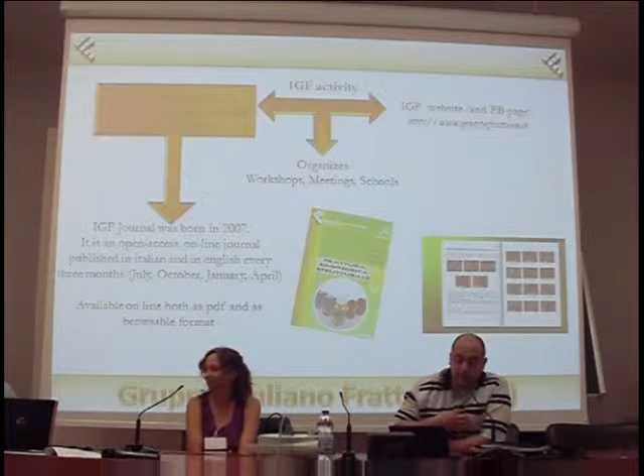I think the journal is quite interesting because the referee process is completed in less than 3 months, so if you want to publish something quickly, we are able to proceed with the review in less than 3 months. It is available both as a PDF format and as browsable online. You can browse it online, it's quite interesting, also funny.

Also, in the last year, we organized an interesting website, you find the address here. In this website you can find up to now more than 2,500 papers, completely available online.

These are not only IGF papers, because in the last months we also published the proceedings of some international conferences. I mean the Crack Paths conference, the Fatigue Crack Paths conference organized in 2003, 2006, 2009 in Parma and in Vicenza by Andrea Carpinteri. We also put inside all the proceedings of ICF 11 in Turin.

Now we also publish online the last 10 years of La Metallurgia Italiana, and all 30 years, just finished now, of Metallurgical Science and Technology. So we are trying to build up an archive where we can find as much as possible inside.

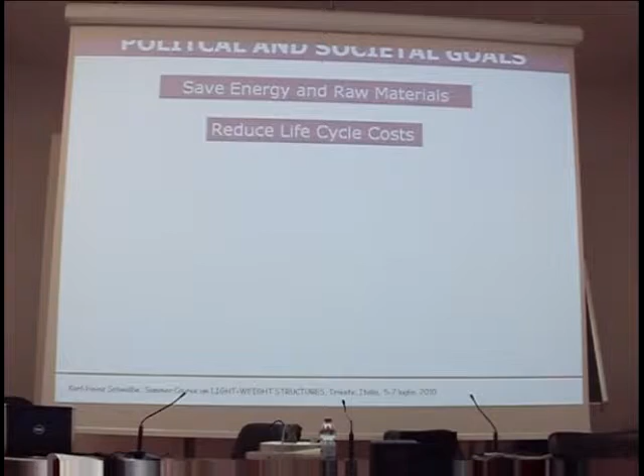One of these goals is to save energy and raw materials. One of the measures for saving energy and raw materials is making our structures lighter, because in that case you need less raw materials, you need less energy to move, for example, a piston in a combustion engine, or to move your automobile or your aeroplane, and so on and so forth.

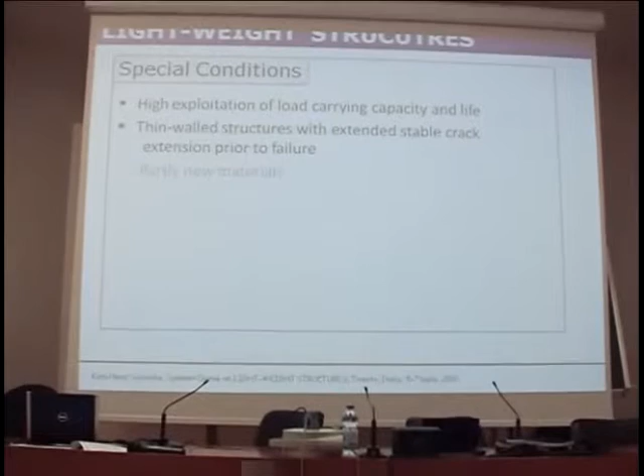And so this is the topic we are now going to talk about. When you talk about lightweight structures, we have conditions that are different from what we have been used to when we build a stationary plant, such as pressure vessels and steel mills and whatever.

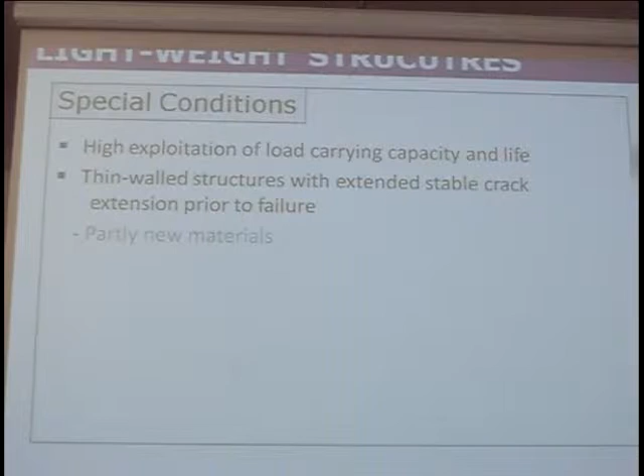And so this ends up with thin wall structures, and in the case of failure, which we of course want to avoid, we sometimes have extended or large amounts of crack extension prior to failure.

We have partly new materials. This is the subject of Professor Iacoviello's presentation.

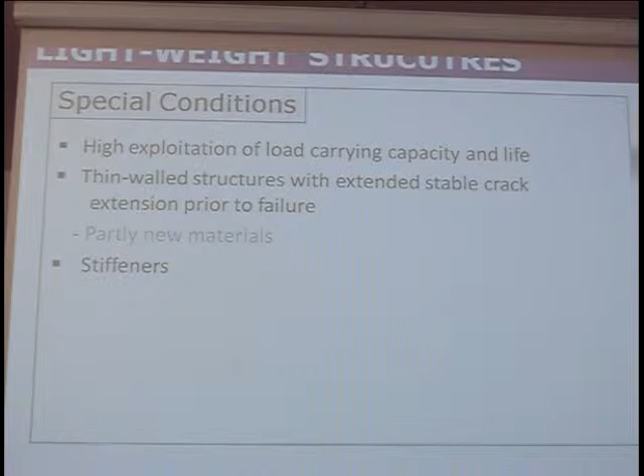And when we go to thin wall structures, which means we have very thin, relatively thin sections - to give you an example, when you enter an Airbus or a Boeing plane, the outer skin is just 1.6 millimeters thick. 1.6 millimeters of aluminum between you and eternity. It's sometimes a bit strange, you know.

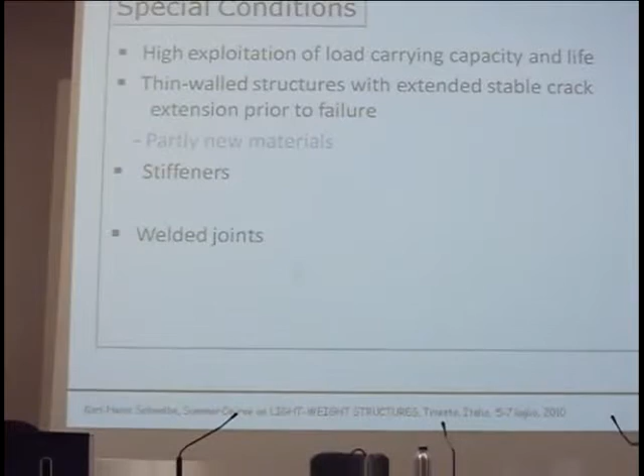And thin materials tend to buckle when you load them, and that's why we need stiffeners. As you can see here, we have to work in stereo here. And we also have welded joints, which I will briefly touch upon.

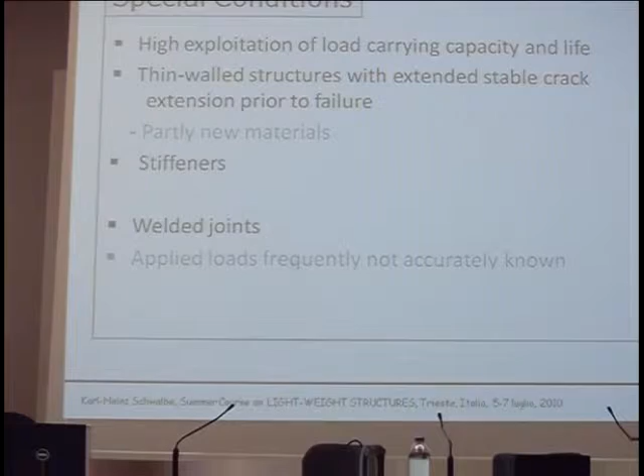And the saddest thing is that in most cases we don't know the applied loads accurately enough. You may know that frequently when it comes to critical parts in aeroplanes or automobiles, test drives are being done and people put strain gauges on the critical locations to measure what's happening during a representative - whatever that means - test drive or test flight.

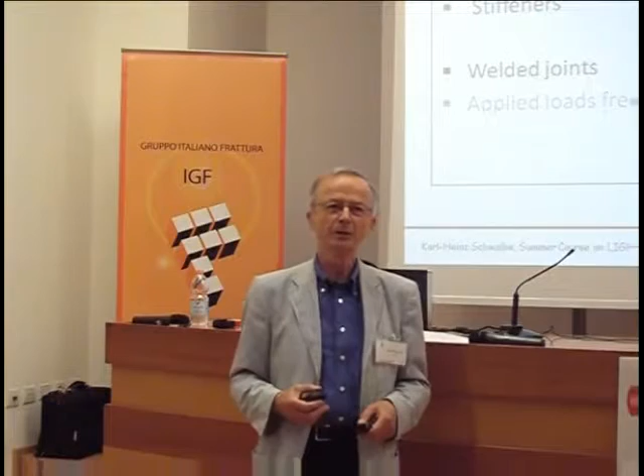But whenever you encounter a very hard, gusty flight through a thunderstorm, you are not quite sure whether the engineers have really recorded the highest load peaks.

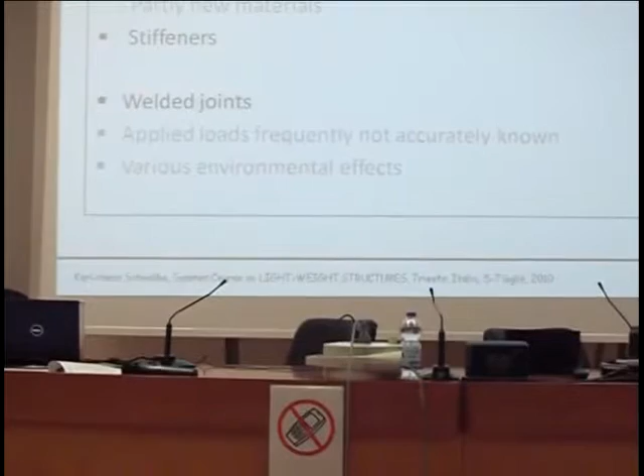Also we have environmental effects, which I'm not going to talk about. This is a separate, very wide area.

And now the question arises, how can we learn about the integrity of such a lightweight structure? A trivial thing would be to do a full-scale test.

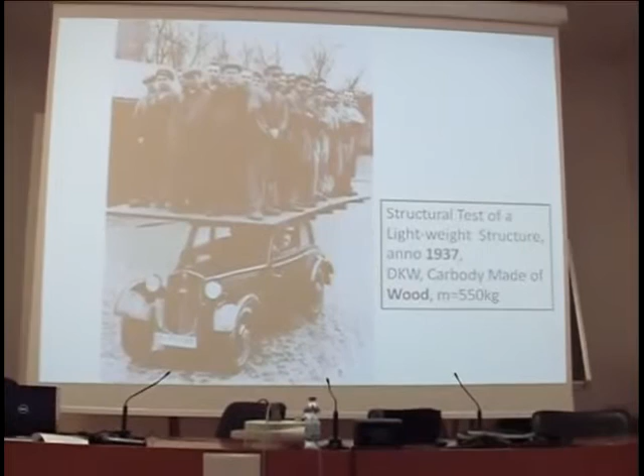Like the one you see here, this was done some 70 years ago, and I like it. I show it in almost every presentation of mine. This is what they call the DKW, which was a forerunner of Audi. You see the four rings here.

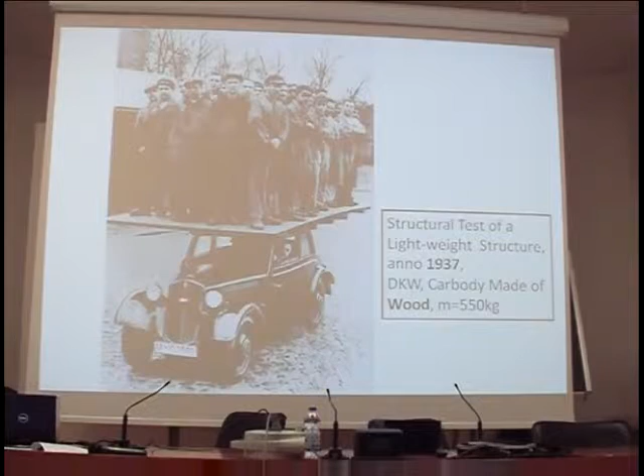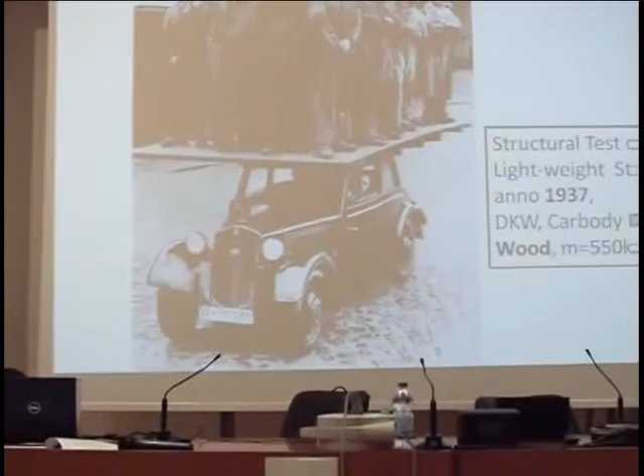So this is an old-timer Audi, and this was a test model. And the men here don't look very happy. I don't know why, but this is an example of a full-scale test, which doesn't make much sense because you would have to test every car, every kind of material you use, so it's just for fun here.

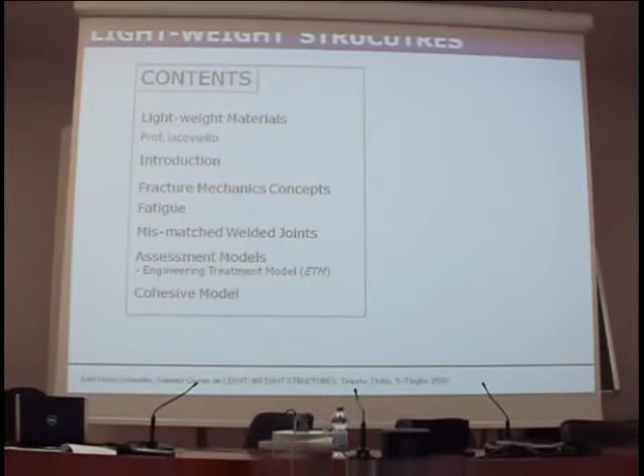Now, the content of what I'm going to tell you for the whole course is... oops, I'm sorry.

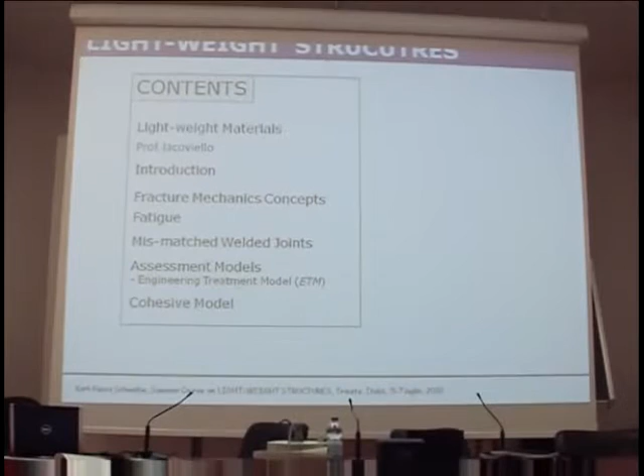After my introduction, I will talk about fracture mechanics concepts, a little bit about fatigue, mismatched weld joints - a very interesting subject by the way - and then assessment models.

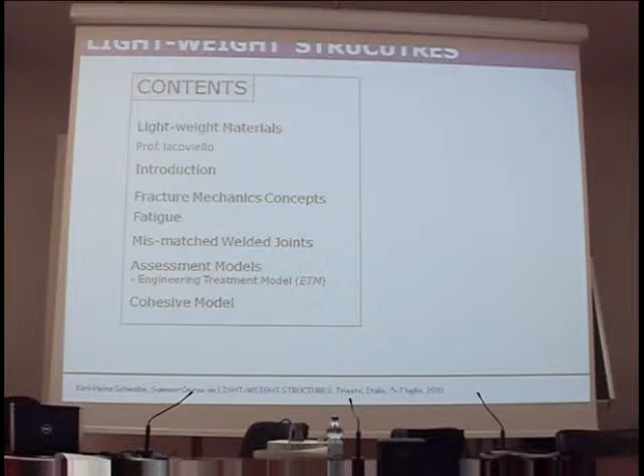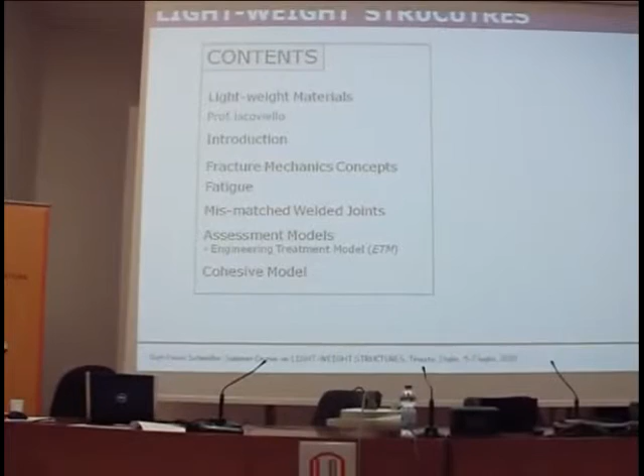And if time allows - I don't know how far we get, usually I start talking and end somewhere, and there's always a danger when somebody invites me to give a talk, I never know when I'm going to stop.

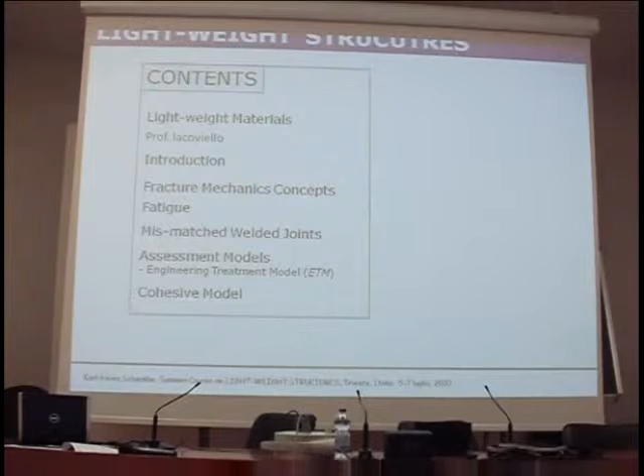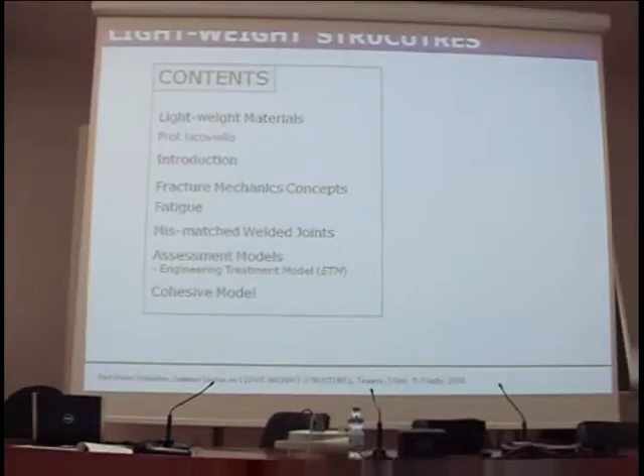And there's a very interesting numerical damage model, the cohesive model, which we use - we haven't invented it, but we have put it into kind of procedural form, so we have put it down into the form of recipes.

So this is the layout, and sorry, there's still a few more slides.

When you talk about lightweight structures, or want to meet the societal goals I was mentioning, one measure is we have to increase the efficiency of energy conversion. This is a hot topic now in automobiles, airplanes, and in the generation of electricity—turbines are becoming more and more efficient. With coal plants, if you think about it thoroughly, a big coal plant producing maybe 500 megawatts of energy has more than 50% going straight to the air, heating the atmosphere for nothing. It's totally wasted. That's when you start thinking.

Now, our goal, or our subject, is weight reduction and reliability. We could go with higher strength material, which is trivial, but there's a problem I will touch upon later. Or we go to lighter materials such as polymers, titanium aluminides, magnesium alloys, aluminum alloys.

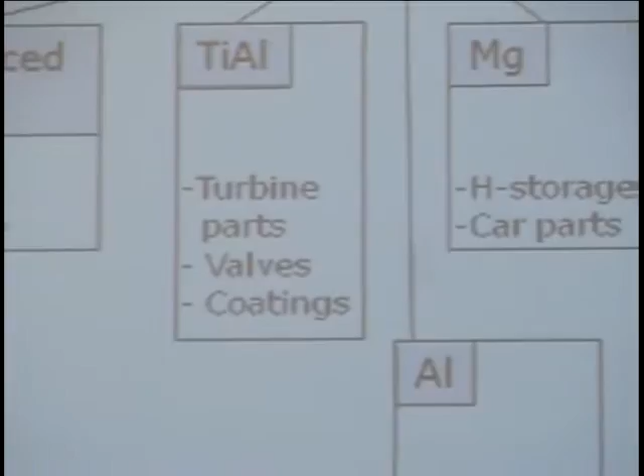By the way, this is a very interesting class of materials. I guess most of you have never had any contact with that. These are for high temperature applications up to 800 degrees Celsius, for example for turbine parts, valves in automobiles, and for coatings, but still not ready for mass production. We've been developing these materials for the last 30 years. The cycle, the time it takes from having an idea for a totally new class of materials to putting it into mass production, is sometimes disappointingly long—you can spend your whole lifetime on a new material. When you invent a new material, you know for sure you can work on it until you retire.

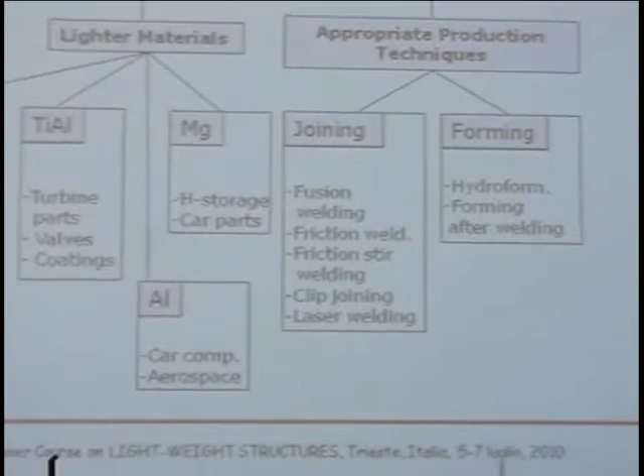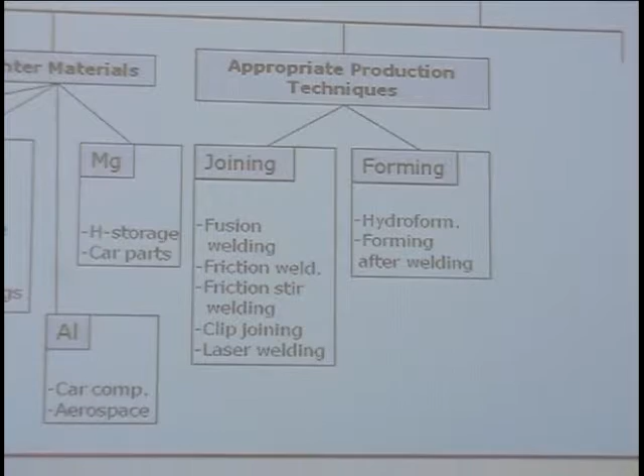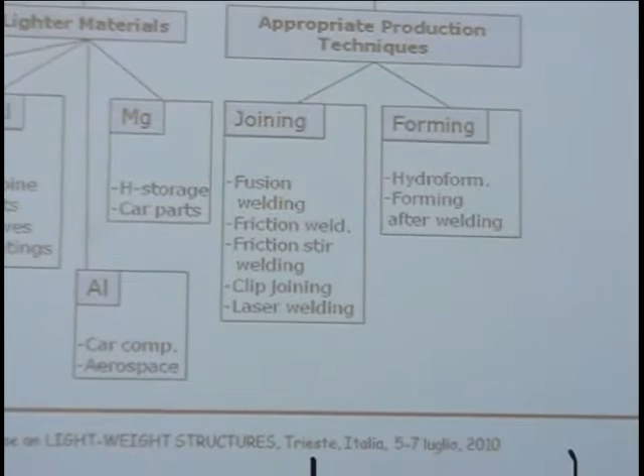We may also use new production techniques in joining and forming. Very interesting is forming after welding, which has problems because a weld seam has different properties compared to the blank you are about to form, so there are difficulties with that. But it's a very, very promising method. We have a number of welding methods, not clip joining, for example, but actual welding methods.

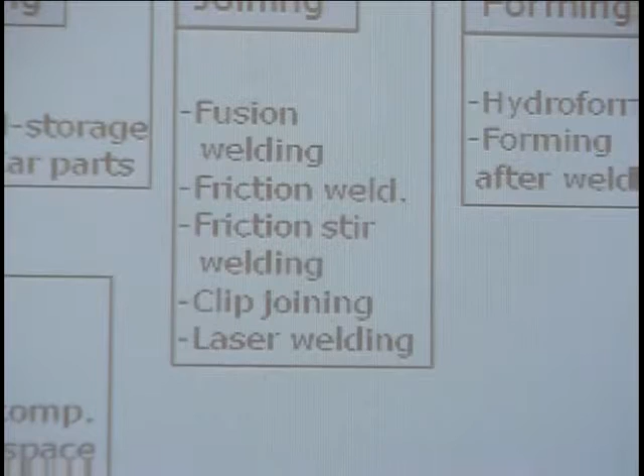A very interesting one is the so-called friction stir welding. Unfortunately, I can't go into the details because it's a subject of its own, but it's a mechanical welding process. You put the two parts you want to weld together, clamped on a base plate, and there is a pin that rotates. You can use a simple milling machine, a console milling machine—you don't need a big apparatus—with a special pin made of a special hard material. It rotates and migrates along the gap between the two parts you want to weld, and it stirs.

By stirring, the material becomes soft. It doesn't melt, it's still in solid condition—like a dough when you want to make a cake, you stir the dough, and in the end you have an almost perfect weld. It's absolutely amazing, and we were the first to combine this with robots so that we can make curved 3D welds, and the properties are just wonderful.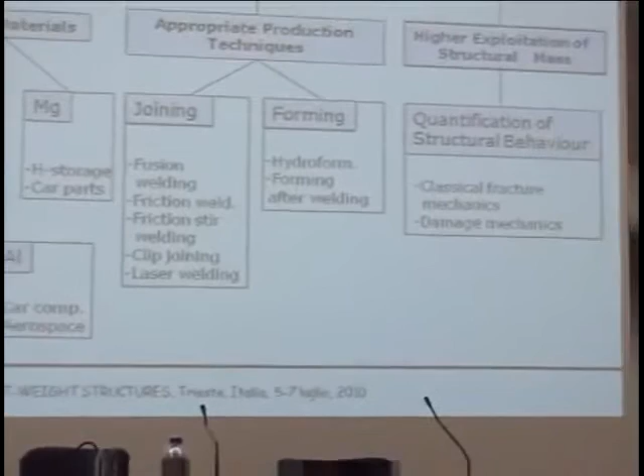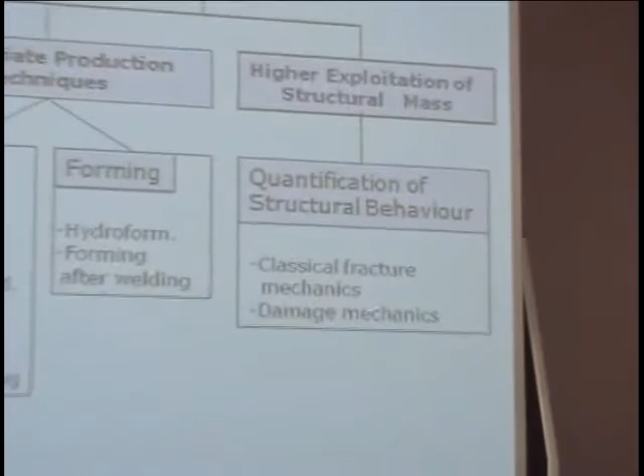High exploitation of structural mass—we have to be able to quantify structural behavior using classical fracture mechanics and the more high-tech damage mechanics. This is the main thing I will be talking about.

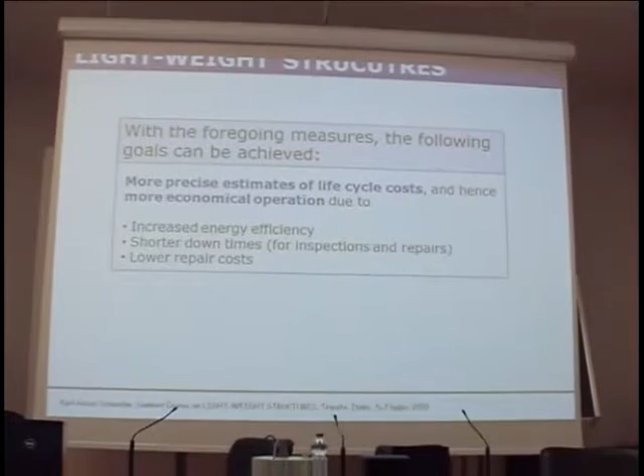If we are able to perform what I just touched upon, we will have more precise estimates of life cycle costs. This is very important. Whenever you go to industry and your company has to sell a turbine for a power plant or an airplane engine, or you sell a bunch of locomotives to Thailand or Russia or wherever, nowadays you don't just sell the hardware—you sell the complete life cycle, 30 years, or 10 years including maintenance, and you have to guarantee a maximum amount of life cycle cost. This is very risky, and people sometimes walk on thin ice. This needs a careful estimate of the real life cycle costs, including dismantling at the end of the life cycle.

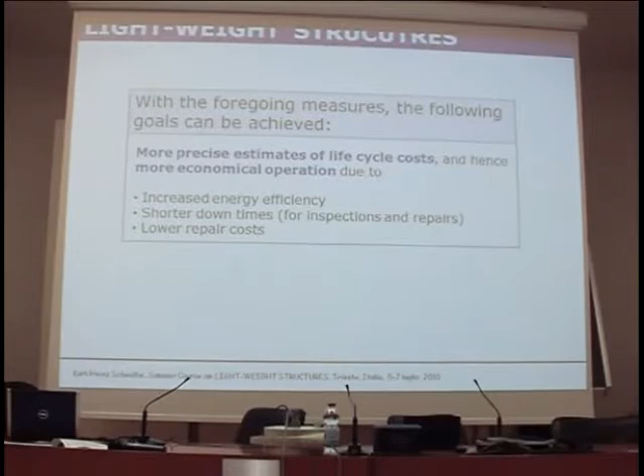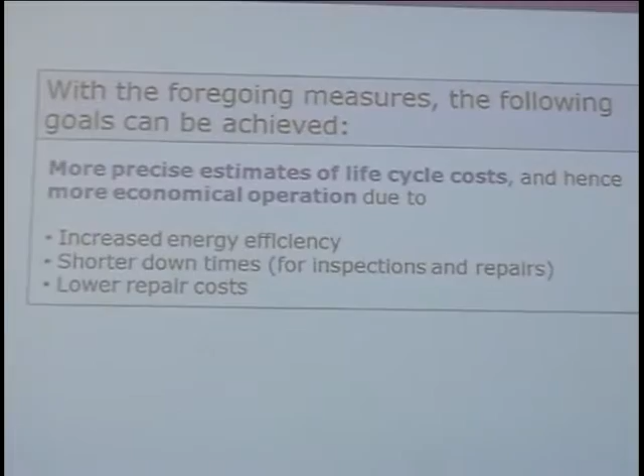In the end it's supposed to be more economical—increased energy efficiency, and if we quantify everything, we can probably have shorter downtimes, because downtimes for a plane, you know, you have to send it into the workshop, or you have to shut down your nuclear reactor, or your locomotive. You may have heard about the disasters we had in Germany with the high-speed trains—it cost the Deutsche Bahn an awful lot of money for that very reason. Downtimes are very expensive, and in the end, hopefully, we have lower repair costs.

And now, Francesco, it's your turn. Thank you.